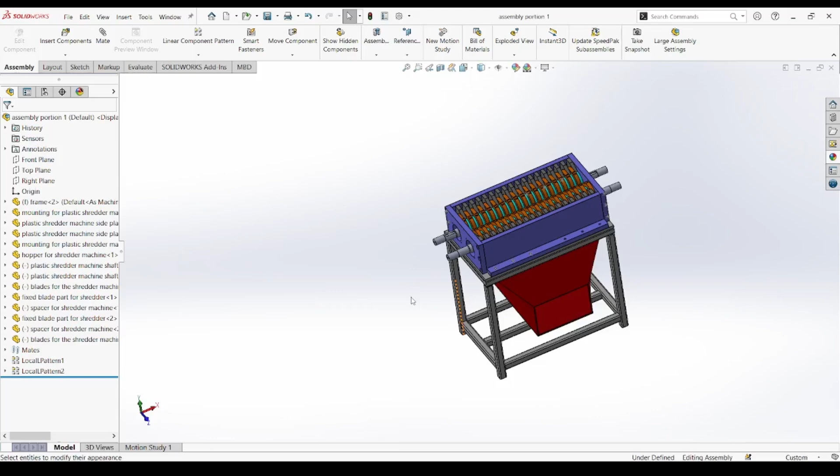Welcome to Blueprint Bazaar. In part 15 of our plastic shredder machine full assembly walkthrough, we take another major step toward completing the mechanical build by assembling the gears onto the shaft and installing the bearing covers on the mounting plates. This part signifies the transition from passive components like blades and frames to active mechanical elements that enable motion

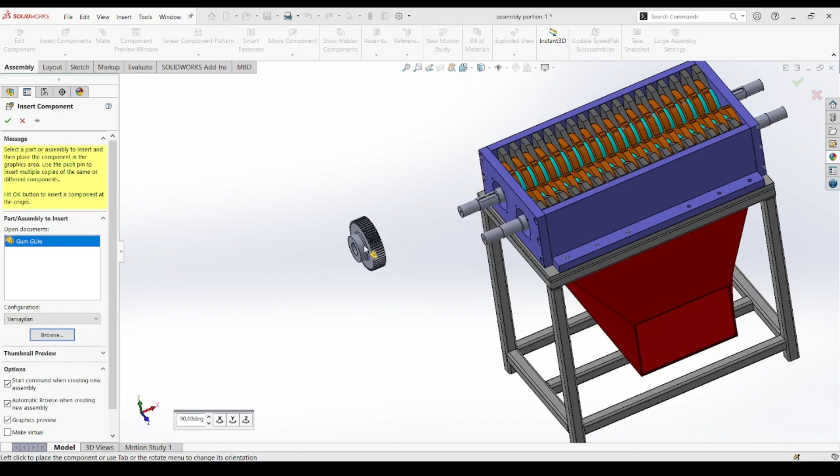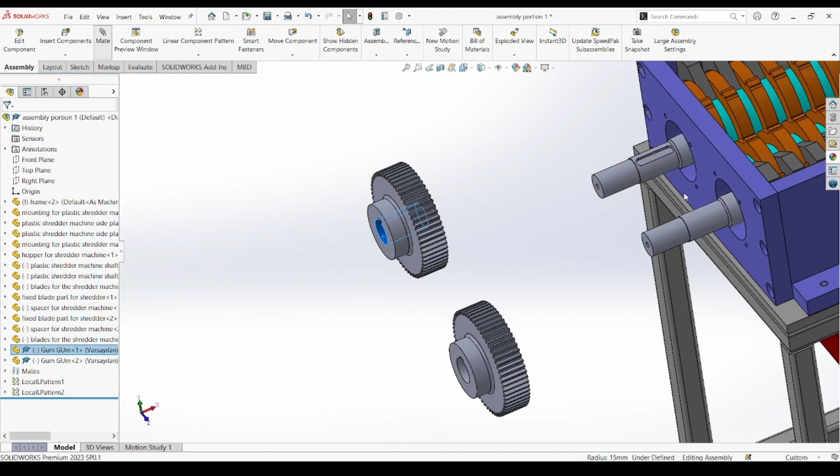transmission and machine functionality. We start by inserting the gear components that will serve as the primary elements of power transmission. These gears are meant to be coupled either to a motor or to each other, depending on the drive system you're implementing. For now, our goal is to position them accurately on both shafts and align them in a way that prepares the assembly for motion simulation and later animation.

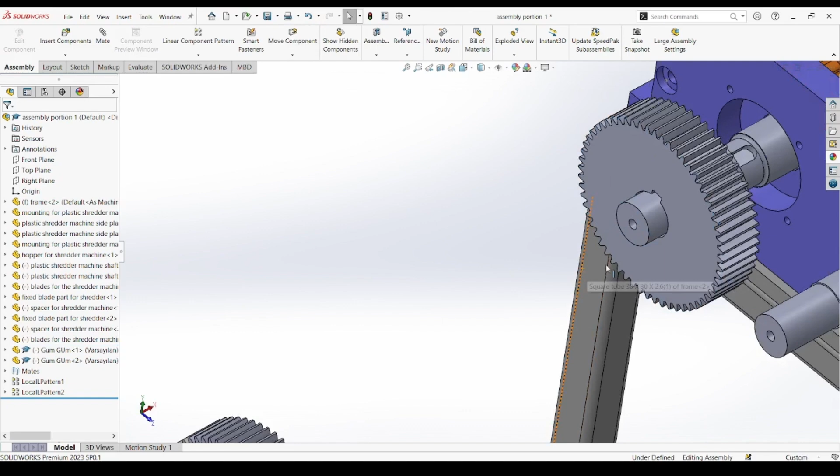The first step in the gear assembly process involves bringing in the gear part files and placing them at the ends of both shafts. Once inserted, we begin the mating process. A concentric mate is applied between the inner hole of the gear and the circular shaft body, which ensures rotational alignment. Next, a coincident or distance mate is used to control the axial position of the gear on the shaft.

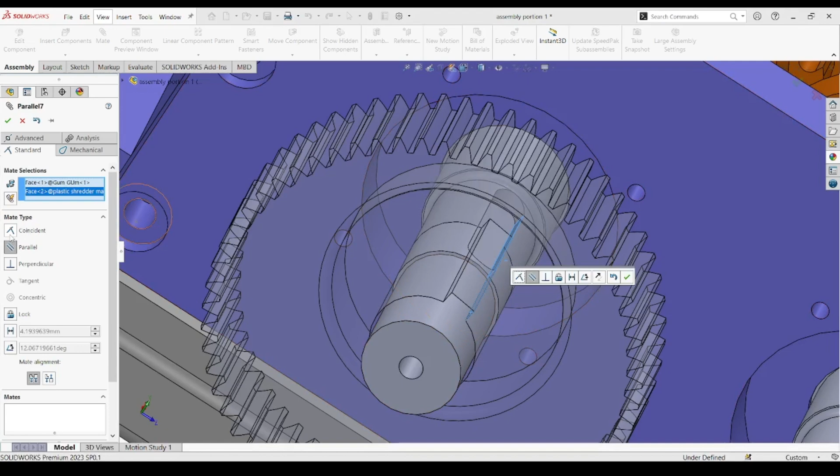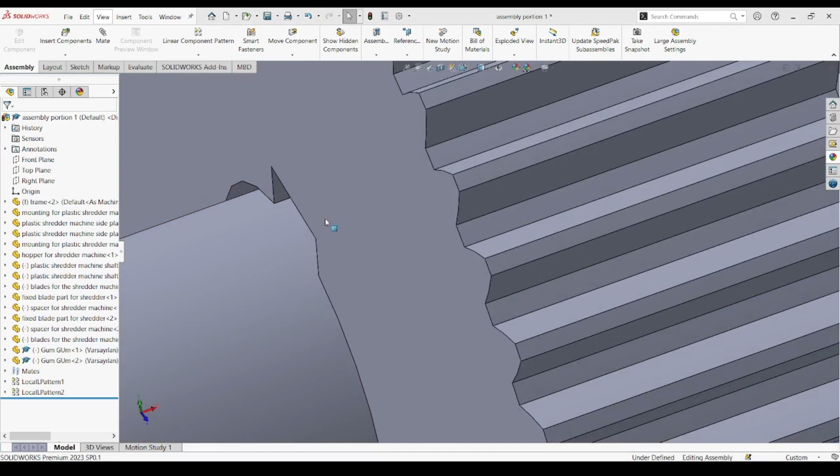This step is crucial because gear spacing must be consistent with the intended meshing mechanism, whether the gears are meant to touch directly or be offset for belt or chain-driven systems. With both gears positioned, we take a moment to perform a basic motion check. This involves rotating one shaft manually inside the assembly to visualize whether the gear teeth align as expected and if there is any potential interference with adjacent components like the frame or the bearing mounts.

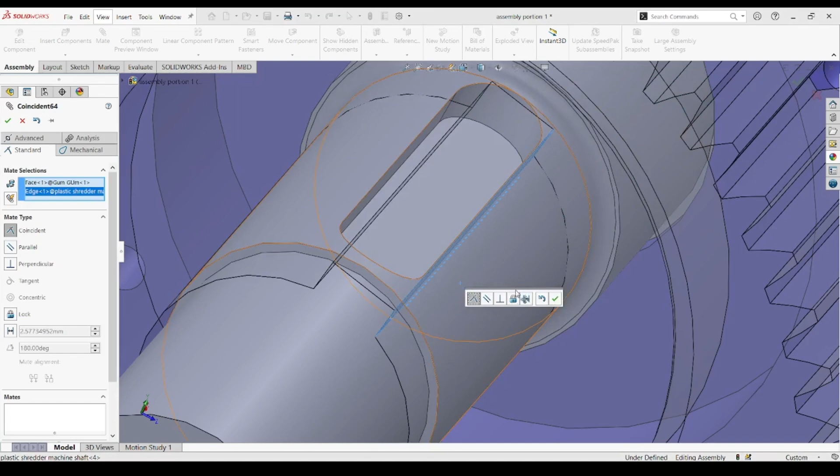Even though we haven't added the motor or belts yet, getting this foundational placement correct now will make future motion integration seamless. The next section of the video shifts focus to the structural aspect, the bearing covers. These components are essential for two reasons. First, they physically restrain the shaft ends, keeping them stable under torque and preventing axial movement during operation. Second, they house the bearings that reduce friction and allow smooth shaft rotation.

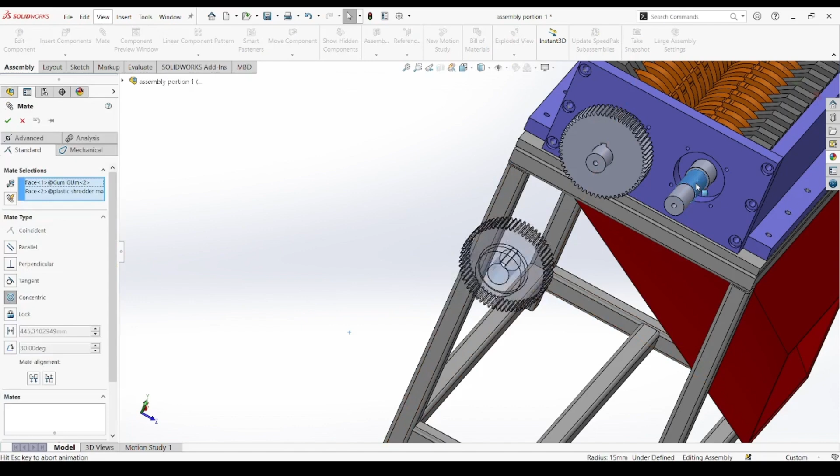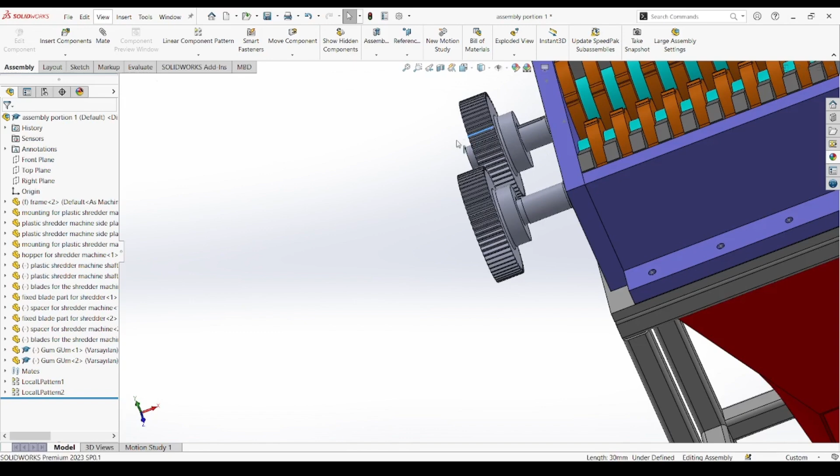To install the bearing covers, we first identify the mounting holes on the frame that were designed for this very purpose. The bearing covers are inserted and aligned with concentric mates to the circular shaft ends, followed by coincident mates or distance mates to place them flush against the mounting surface. Care is taken to ensure that the bearing cover is not interfering with the shaft rotation, so the internal bore of the cover must be slightly oversized compared to the shaft diameter to allow free movement.

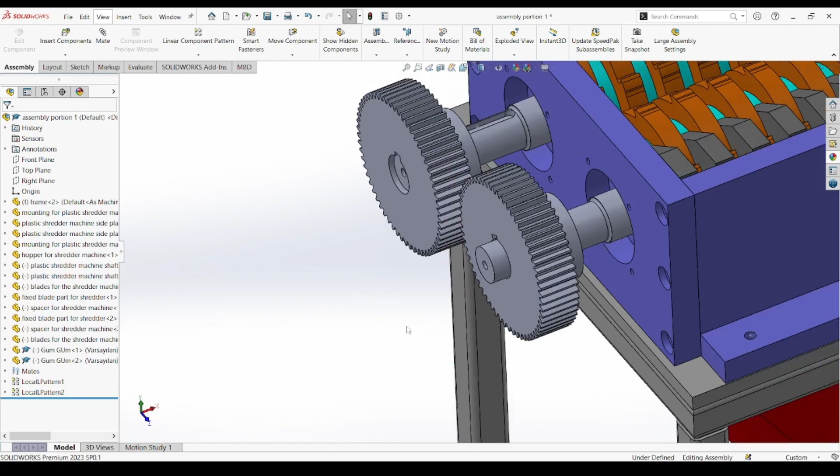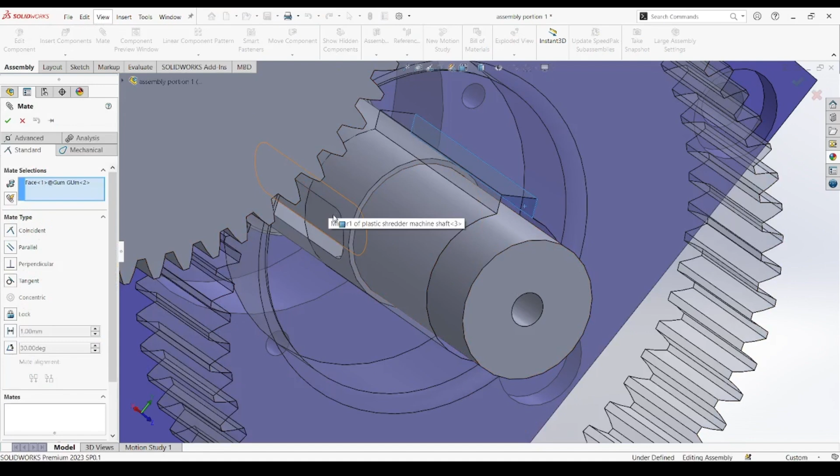One thing we highlight in this part is the importance of tolerance and spacing when dealing with rotating components. If the bearing cover is misaligned or placed too tightly against the shaft, it can lead to friction, heating, or premature wear during real-world use. Likewise, a loose fit could result in vibration, misalignment, or noise. So, this segment offers not only the visual technique for placement, but also the design reasoning behind every mate.

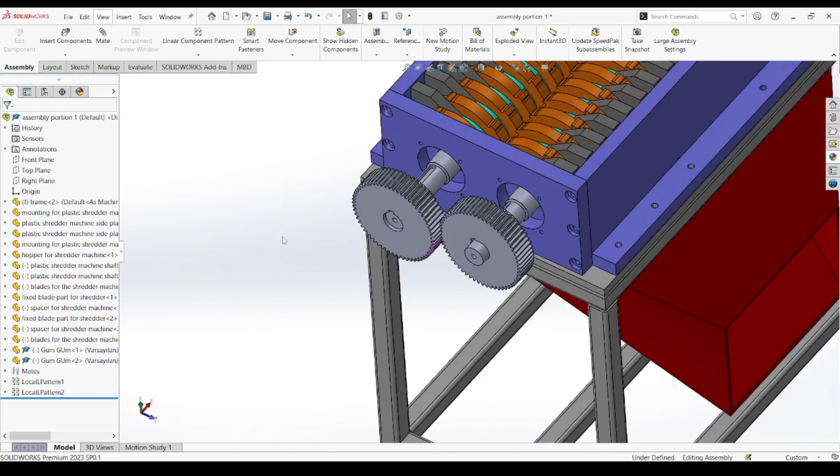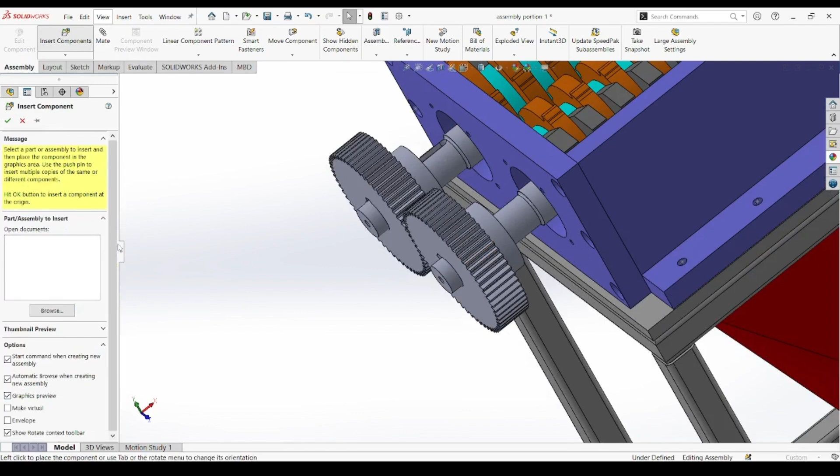After placing both bearing covers and double-checking their orientation and position, we do another brief motion check. This is done by manually rotating the shaft again and observing how it interacts with both the gear and the cover. The motion should be smooth, and there should be no collision with either the side plates or the mounting frame. By the end of this part, the assembly now has a complete mechanical loop, from blades to shafts to gears, and finally to support via bearing covers. The machine's rotational axis is now defined, and we are one step closer to simulating its functionality.

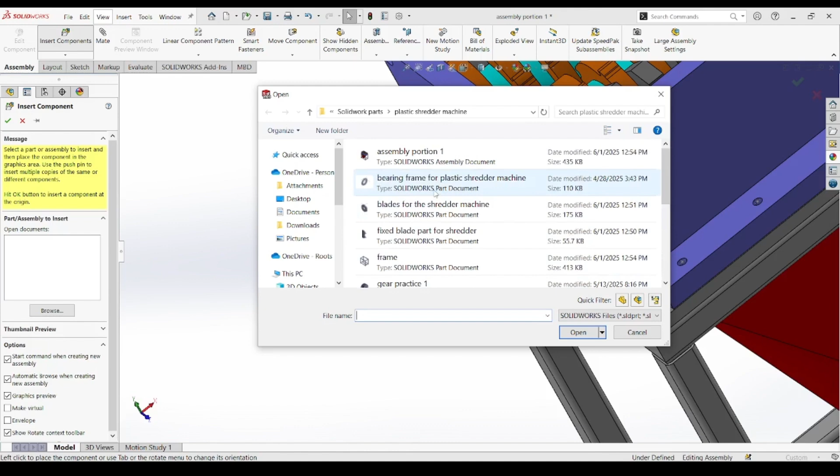This part is particularly helpful for anyone trying to understand the relationship between static mounting elements and dynamic rotational components. It bridges two crucial elements: design intent and real-world mechanical behavior. If the gears and covers are not placed with proper mating constraints and spacing, the entire machine's efficiency and durability could be compromised. Before we move toward bearing assembly in the upcoming part, it's also worth discussing how gear alignment impacts not just motion transfer, but also load distribution across the shafts.

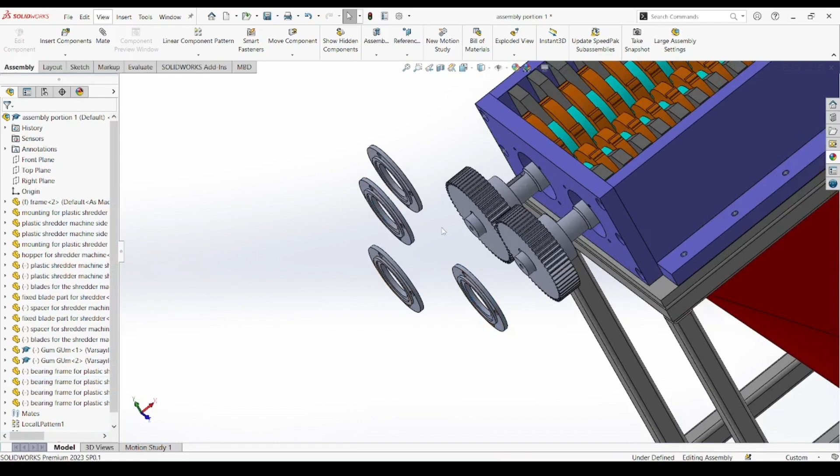Misaligned gears can lead to uneven wear and gear tooth failure over time, especially when dealing with harder materials in shredding operations. That's why this stage, though it appears simple, plays a foundational role in setting up long-term mechanical reliability.

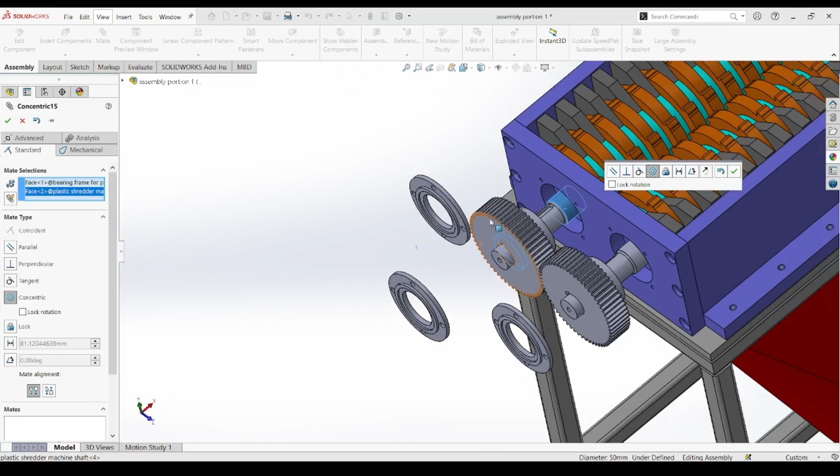Additionally, we touch briefly on gear orientation. Depending on the type of gear, spur, helical, or bevel, the mating process might involve different angular orientations. In our case, we're using spur gears, which require parallel shaft alignment and face-to-face engagement. This makes it easier to ensure perfect symmetry and consistent rotation during the testing phase.

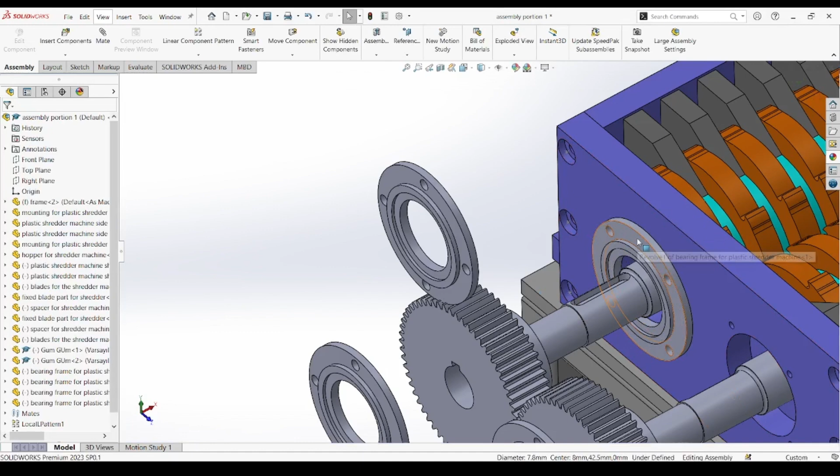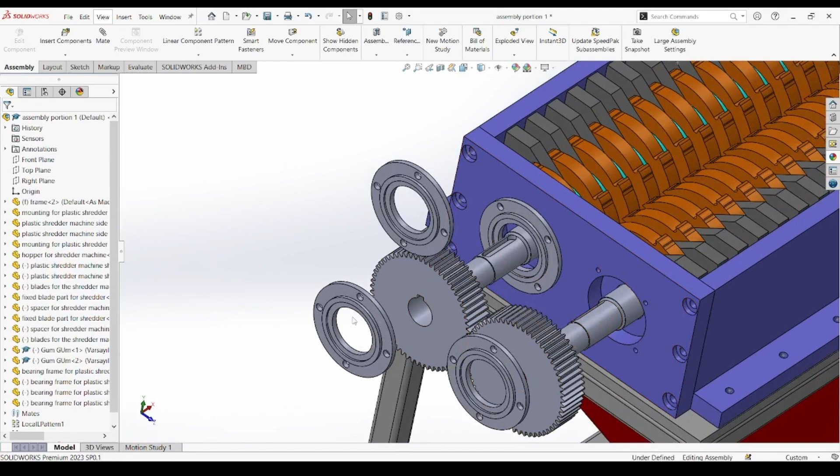We also take a closer look at how the bearing covers are seated into the assembly. While their main purpose is support and housing for the bearings, their design also affects how forces are distributed into the mounting plate and frame. If the cover doesn't sit flush, or if the mounting holes are not aligned, it can skew the shaft slightly and misalign the entire gear system. That's why we emphasize slow, deliberate mate placement during this section of the walkthrough.

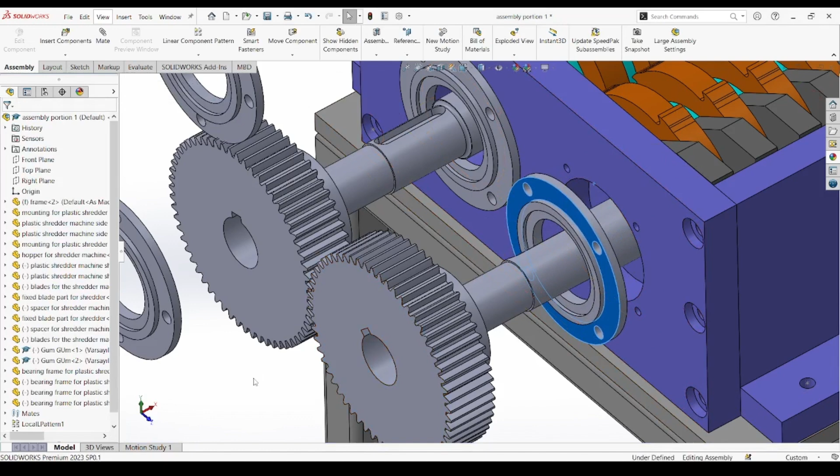Another key takeaway is the order of operations in this stage of the assembly. We first secure the gears, then add the bearing covers, not the other way around. This allows us to lock the gear positions relative to the shaft before encasing the ends, which helps preserve mechanical alignment during test rotations. Reversing this sequence could trap the shaft in a fixed axial position before gear placement is finalized, complicating adjustments.

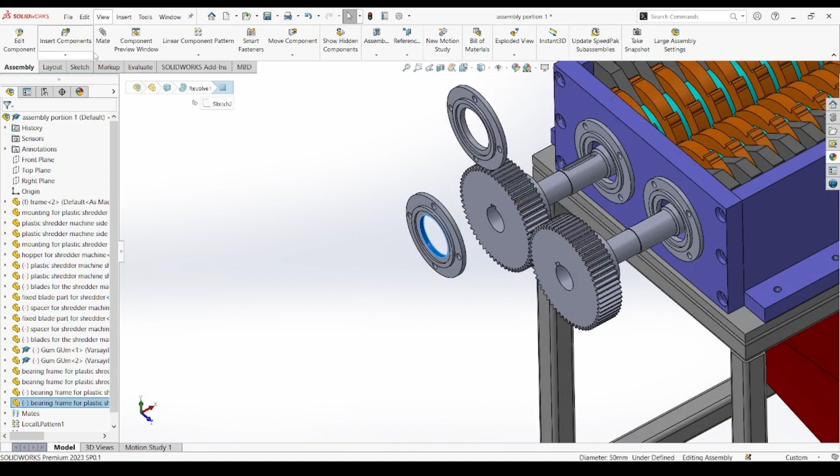For those planning to motorize their plastic shredder machines, this part also serves as a helpful checkpoint. You'll want to note the available space around the gears for motor brackets, couplings, or belt systems. While we won't be adding the motor in this part, having the gears placed correctly ensures there's room for power transmission hardware and simplifies your design process when that stage arrives.

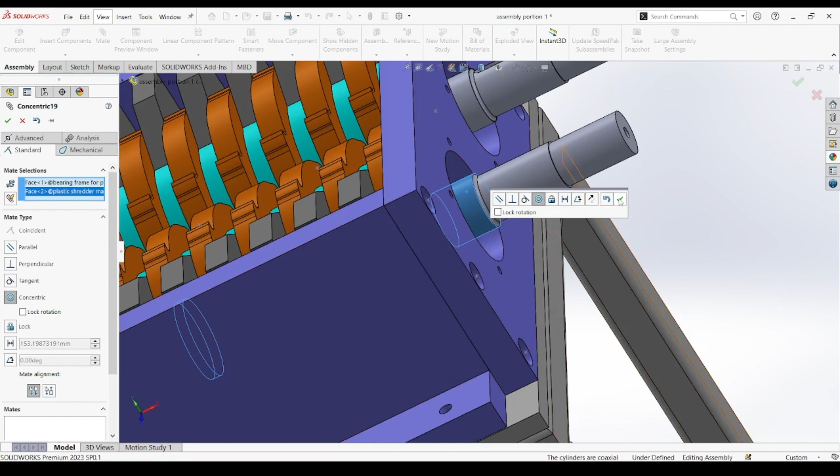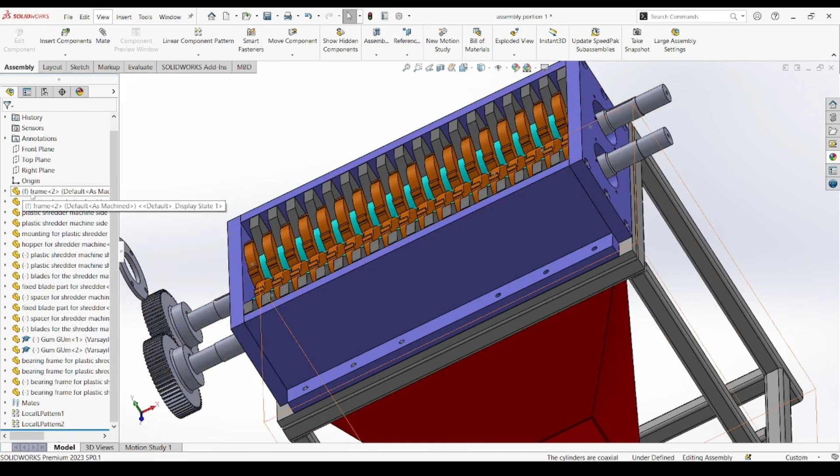Another important aspect covered in this part is the axial stability introduced by properly secured bearing covers. These components not only prevent the shaft from wandering during operation, but also absorb and redistribute forces that result from gear engagement and shredding resistance. This structural support is vital for maintaining alignment over long-term use.

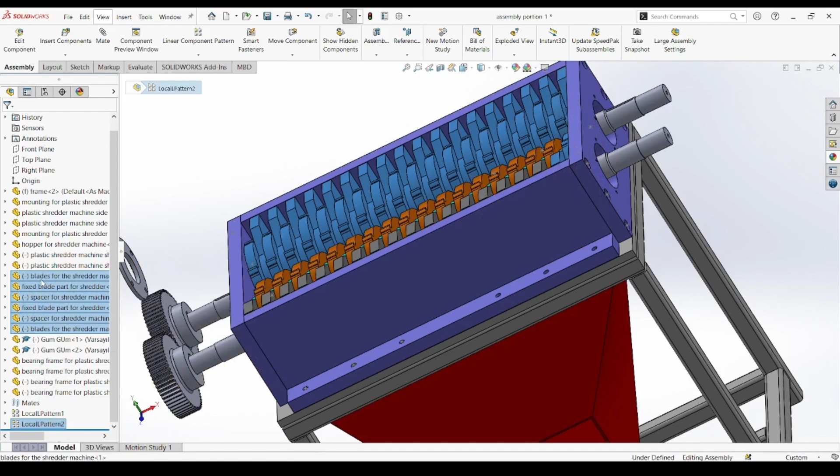We also touch on how this step prepares the assembly for future animation or simulation. With gears in place and bearing covers installed, we've effectively defined our machine's drivetrain geometry. That means when it comes time to simulate torque application or rotational movement, we'll have the correct constraints and clearances already embedded in our model, saving time and avoiding rework.

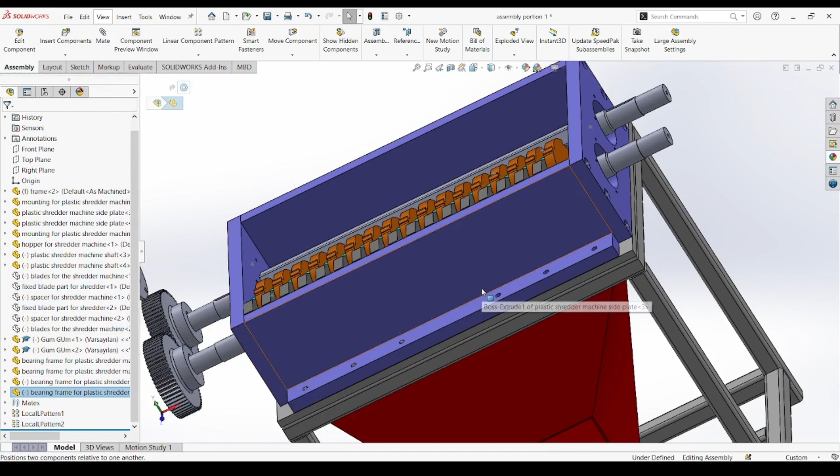Additionally, this part provides a great opportunity to teach beginners about design intent behind real-world assemblies. Every mate, every positioning decision, and every motion test reflects engineering judgment, balancing ease of assembly, part accessibility, and performance efficiency. By watching and replicating this process, viewers gain not only SolidWorks skills, but also mechanical insight.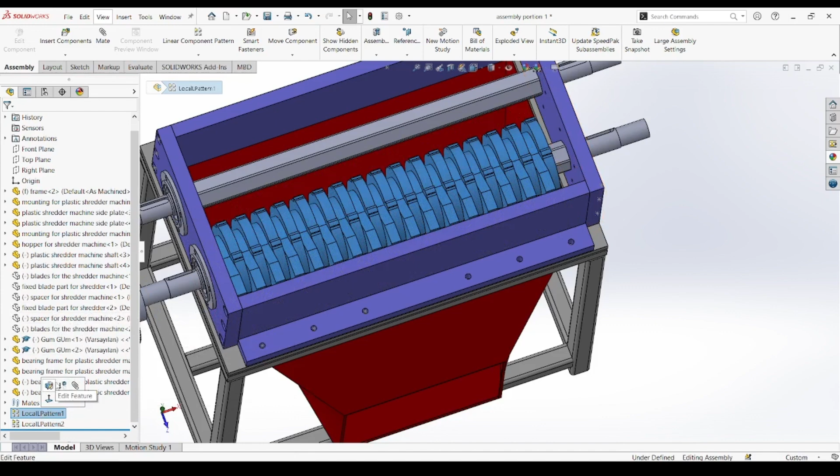To further reinforce mechanical reliability, we encourage viewers to consider how thermal expansion and operational wear might affect shaft alignment over time. In real-world applications, gears and bearings must not only be assembled correctly, but also be serviceable. Designing the assembly so that these components are easily removable or adjustable can significantly reduce maintenance downtime and increase machine longevity.

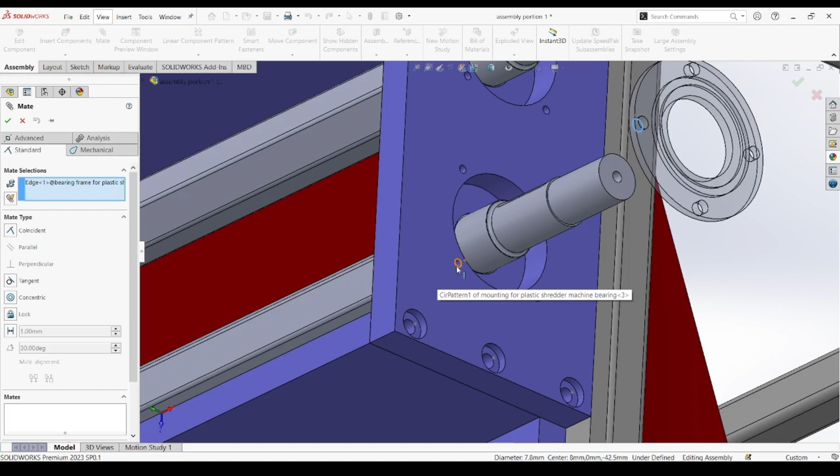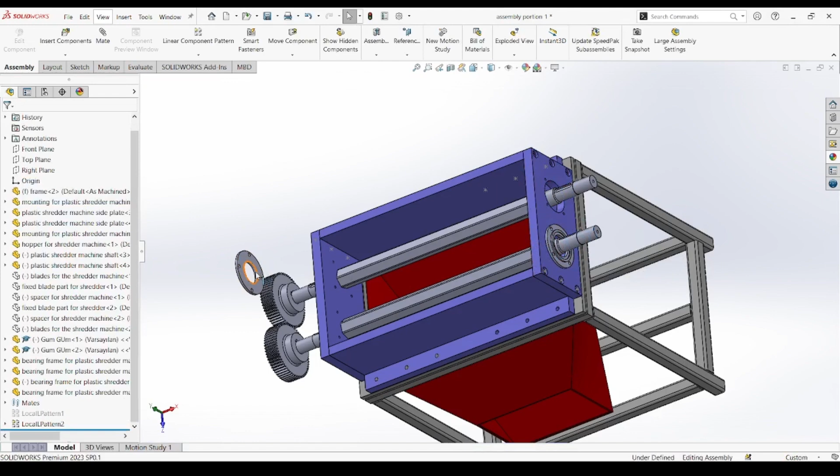Lastly, we briefly discuss gear orientation and phase alignment, especially relevant if your setup involves synchronized blade motion on both shafts. Ensuring the gears are properly phased allows for even blade engagement, minimizes torque imbalances, and leads to a smoother shredding process overall. These final checks, though often overlooked, can be the difference between a functional prototype and a production-ready machine.

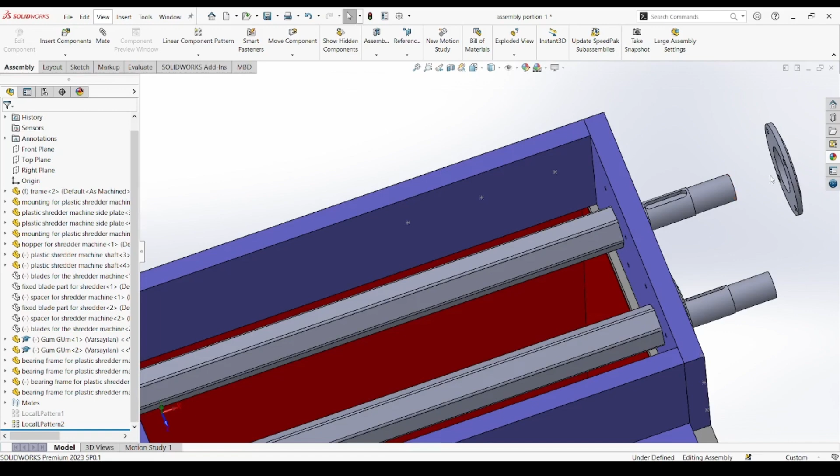In the next episode, Part 16, we will assemble bearings on the shaft and notice the blade interaction to analyze movement, check for mechanical interference, and validate the integrity of the cutting mechanism before finalizing the drive system. The main purpose is to grasp the ideas shown by each short step-by-step tutorial so that you can fully replicate the model and easily understand the features used.